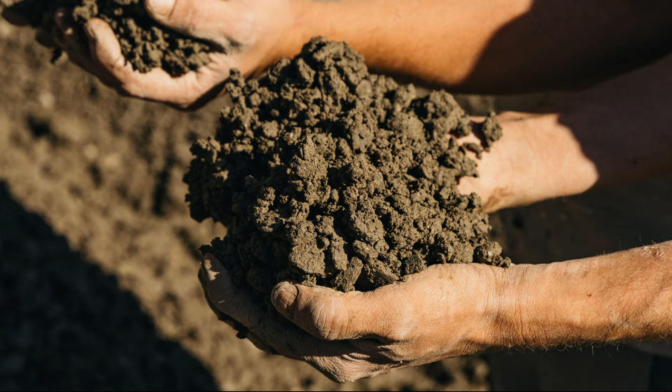But now, where does our building material come from: earth, and also the gravel, the sand, the rocks? It is excavated, it is eroded material from the mountain. And erosion is always still working. We have so much material for earth construction. And this pure earth, it is gravel, sand, and clay, mud, binding material. This is the earth material. We can build with this.

All over the world and in history, people have built with the material on the ground because they did not have so much time and possibility to transport the material. They really used the local material, and if you look around in history, there are really wonderful, simple building examples like the Alhambra, or in Syria, or in Egypt, and the material earth is always used in different techniques.

We have 40 different techniques in the world, and which technique we use depends on the geologic situation, on the climate situation, and we had wonderful building towns and examples, and it is only pure earth. I'm always fascinated when I see this, or when I build with pure earth, it is only earth. It is so simple, and sometimes it is very difficult to find a simple way.

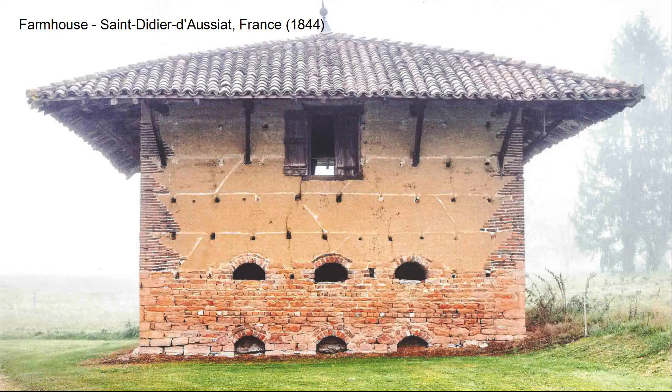In our life, we sometimes think in a very complicated way, and to get back to simple is not an easy way. Sometimes a crisis gives me a better solution. I have to think about how I can change it, because sometimes I have no tool or no experiment, so I have to find a new solution. And it is very important that this new solution is simple.

Also in Europe, earth is a traditional building material. And there is a saying: earth construction needs a good boot and a good hat. And if we look after some details, then it really works. All over the world we find wonderful experience, but the image of these buildings is not so good anymore. But it can show me how we can transform it in the present.

Earth construction in Europe. As a young student, I was wondering why we don't build any more in earth construction in Europe. Because we lost the experience during the industrialization. Because for 200 years we had no real big energy problem. We took out the coal and later the oil, and we forgot to build with earth construction.

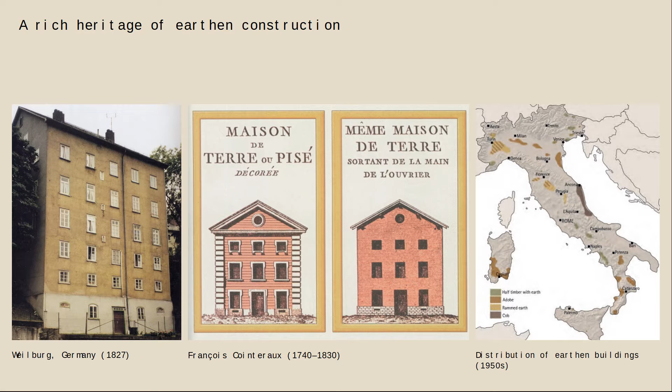You cannot build a structural building like my house or everything what we have done. It is a rule, it is not allowed to build earth construction. This is really a pity, and why, I don't like to explain everything.

It is lobbyism and everything. And this shows in Germany a newly renovated rammed earth house from the 19th century in a wonderful condition. There are hundreds of earth construction houses in this area. I know a 3-story high factory building in rammed earth for 200 years. It is still alive.

It shows a lot what it can be, and all these buildings are built really with the excavation material. And at that time, for 200 years, they built in earth construction because it was cheap, it was good, it was healthy, it was stable, and it was the local material.

And the lifecycle of earth construction is a circle. A circle is like this. You have the excavation. Sorry. Excavation. You have the excavation, or you have the building material, and you make the production process. You build, and it goes back.

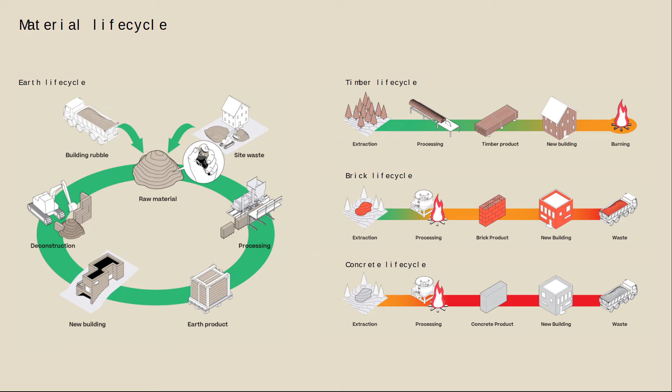Pure earth construction, recycling 100 times, 1,000 times, you don't lose the quality of this material. This is really fantastic in earth construction. Because all other materials, like timber, brick, concrete, are a line. It is no circle. And if it's not a circle, it is not sustainable.

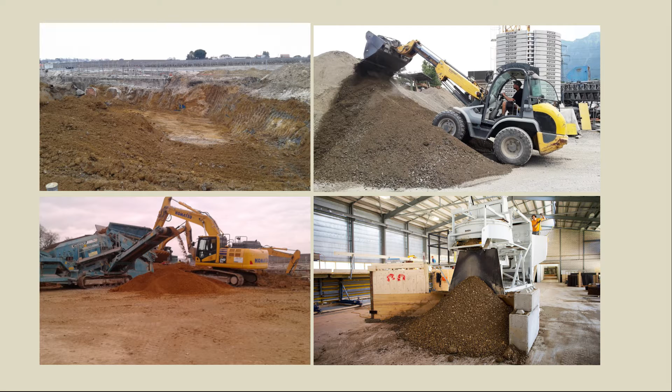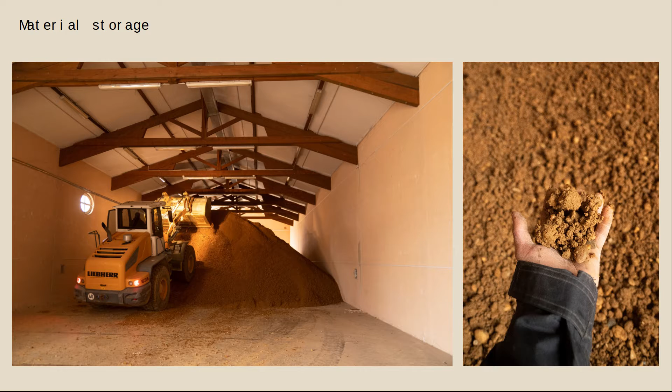We go there, look, make a hole, we take the excavation, make recipes, make tests, then we separate it with normal machinery, and we store it on the side in an old building, and this binding earth gravel is our material. And we make tests, and we look for the best recipe, and we always leave it pure earth.

And now this picture, I want to say, because mostly, if you see on the internet, a lot of rammed earth buildings are not rammed earth buildings, it is rammed concrete. In America, they say dirty rammed concrete. It is earth from the building site, mixed with concrete or with cement or lime or other additives, and then you ram it. You make it stronger, maybe, but the lifecycle doesn't work again.

And for me, it was always very important to develop the machinery, to develop the tools, and not to change the material. Let the material be pure. You excavate it, you look at different excavation material, mix it together so that you have a good quality, and you ram it, and I named this calculated erosion. It is like in nature.

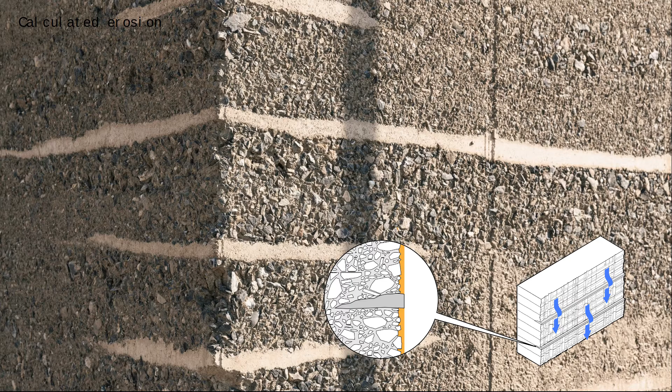In the mountain, the water is running down, and this lime, these are lime plaster layers, rammed in there. It is like a speed breaker for the rain water. And the wall gets more rough. The walls are changing, but they are not destroyed.

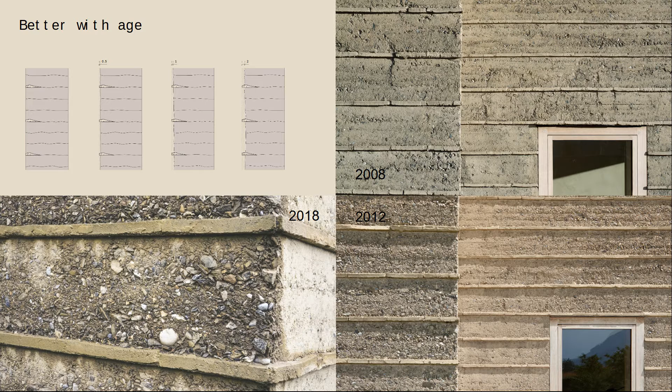And I have several buildings built with very little roof, and there the speed breakers are bricks, or here with lime. And you see, here is the erosion, here is the sedimentation, here is the erosion, sedimentation. It is always a moving process. Mostly, calculated erosion is not a technical problem, it is a psychological problem.

If after 3 hours of rain a lot of earth is lying on the terrace, the client will call me: what's happened? My house will be swept away. But we have to discuss, we have to see this moving, this change of the earth construction, you have to accept. In the same way you accept that wood construction gets gray and changes its coloring like this.

There is enough experience I have made in my workshop here with bricks, but you see also in Yemen and in other countries the same solution. It works a very long time. And this earth construction is all over the world in a different way. You can make climate buildings.

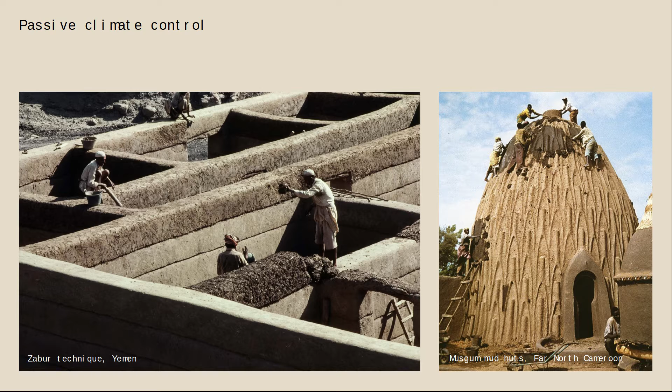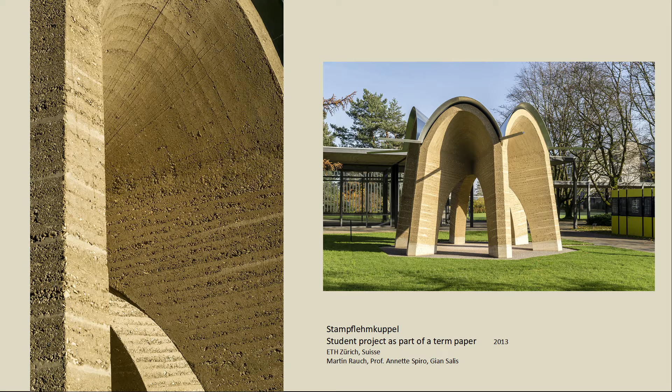You see here the calculated erosion, and the form is from the water developed themselves. So I think it's very interesting, and you can also make some arches. We have made it in ETH with students. Rammed arches. Is it possible for building new structure systems also in rammed earth?

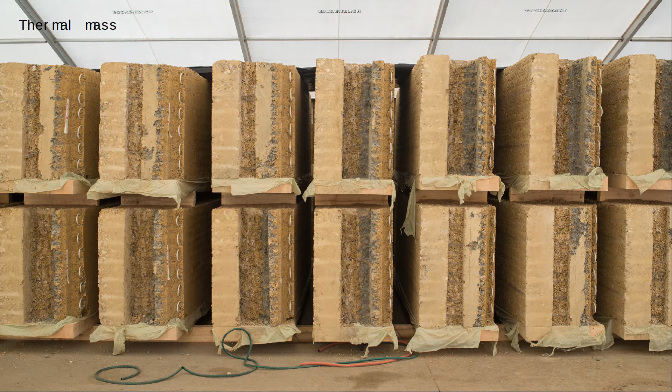It's to develop this, and we have to modernize the earth construction, and it gives a lot of different solutions. We produce earth construction now. If we compare concrete construction 80 years ago and how they developed it, it is a lot of changing.

My own house: after 25 years experience in earth construction, I wanted to build my own house as a self-experiment. As a co-planner, I have planned it together with Roger Boltshauser. As co-planner, as a client, and as contractor, I have to take all the responsibility myself. And this building is for me very important to get the trust to this material and to this technique.

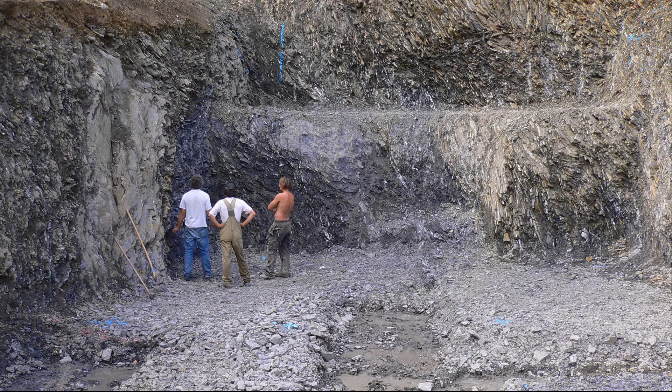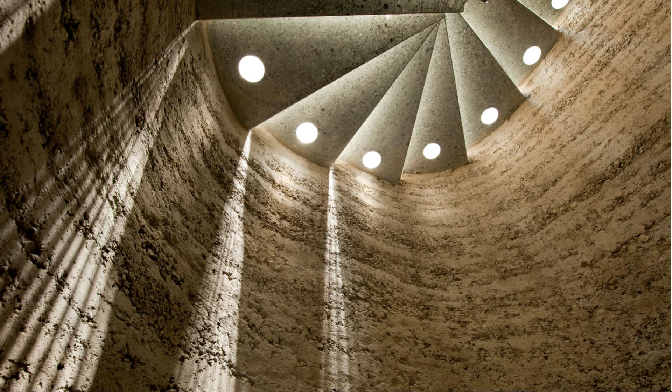Trust is a very important word. Trust to the material, trust to the system. So we had used the excavation. It is Flüschgestein, it is special earth. And we have 100% excavation mixed only with a little bit of water, rammed it, let it dry. It is dry

excavation. It is only rammed excavation connected with special, wonderful tiles, and that is also in a good design mood, and also rammed earth floors, plaster with clay, white clay plaster, and here outside the calculated erosion on the east side. There you have really no erosion until 15 years.

And you see there is a very monolithic work with earth construction, rammed like a rock in the landscape. And the next project, what I have started in 2019, to build my own work hall. It is because I need a better tool to make big experiments, to make big projects.

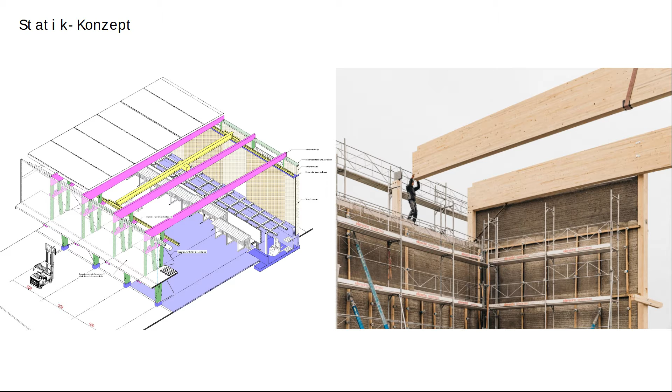We get more trust to this, and that is a very sustainable way to build. And we should not only build our houses and living spaces in a sustainable way. We should also build our industrial buildings in a sustainable way. The office building we are still building now.

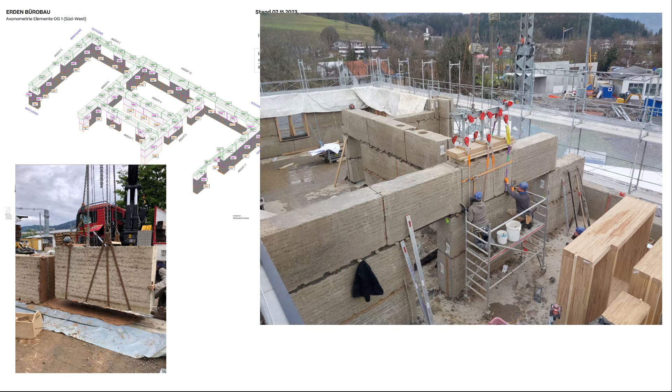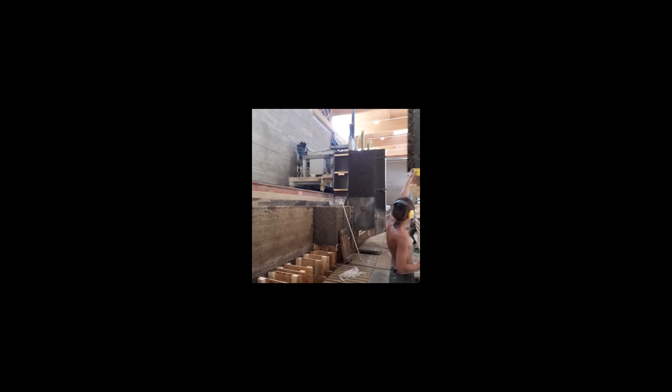We have produced the elements with raw material, only this rammed earth, the rammed excavation. We have cut it in blocks and then set them up, like Lego. You build the house like Lego. And there it is, the production: there is a 50-meter long line.

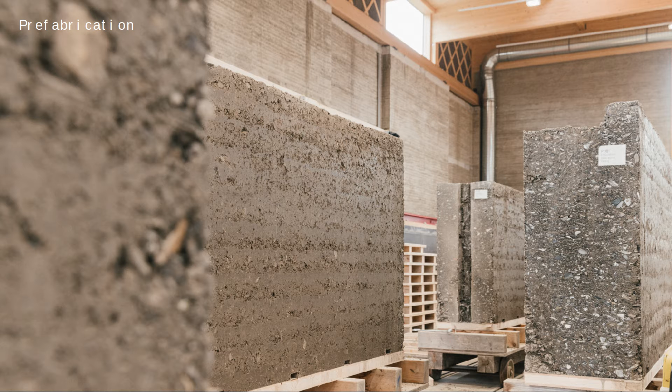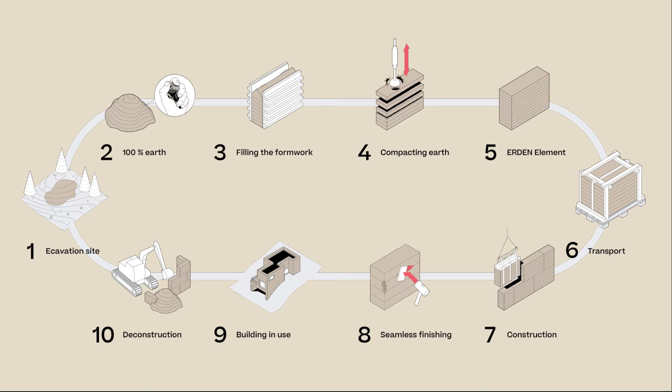You fill this with earth, ram it, then you cut the elements, then you put out the elements, let it dry. Each element gets a number, and then you transport it to the building. And so the circle is closed. Excavation, building, and so the circle is closed.

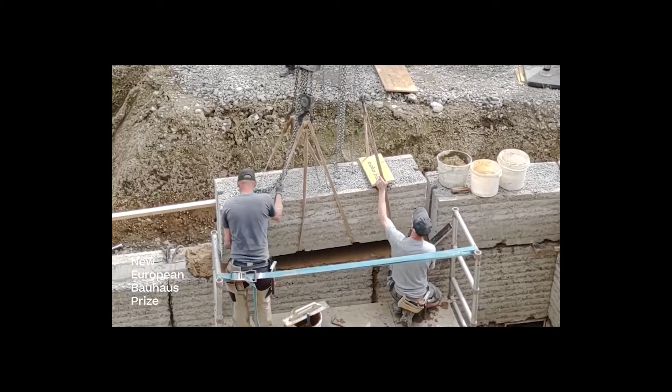And 2012, this was a flagship project with the circular building in Switzerland with Herzog & de Meuron. There was the question to build a factory 110 meters long, 12 meters high and 30 meters wide, a very big work. We needed about 8-9 months of production for this.

And in this very high cost country, Switzerland, I know it is only possible to produce this factory if we use new machinery, new tools to be more economical. So this factory is for herbs, for storage and working with herbs, and there the climate is also very important. And so the walls are 45 centimeters thick, and these walls are also a climate aspect because they can take the humidity and bring it out and back.

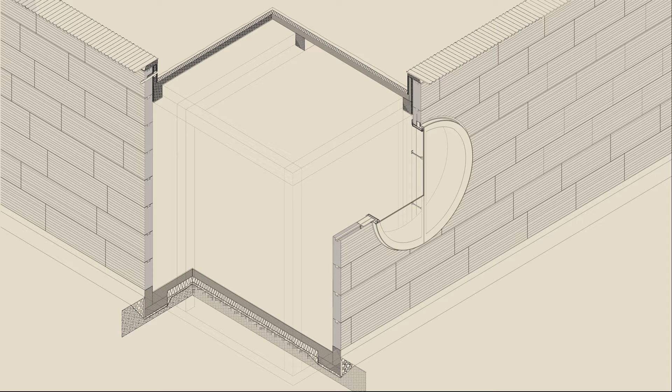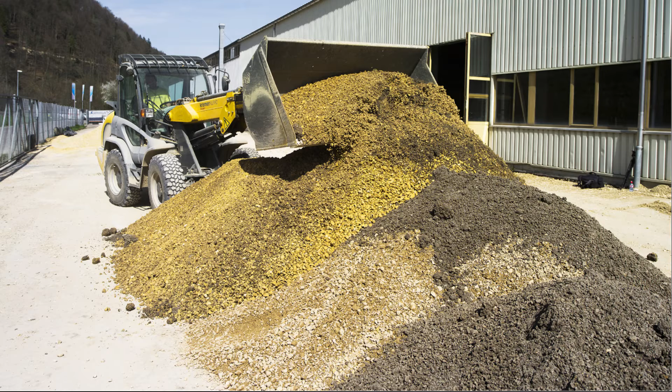Transsolar has simulated it first, and after 5 years, they have seen that the earth construction really works as a climate machine. And this is also a very new aspect. So we mix this together with a little bit of water. It is only 9%, it is very dry. And then you ram it.

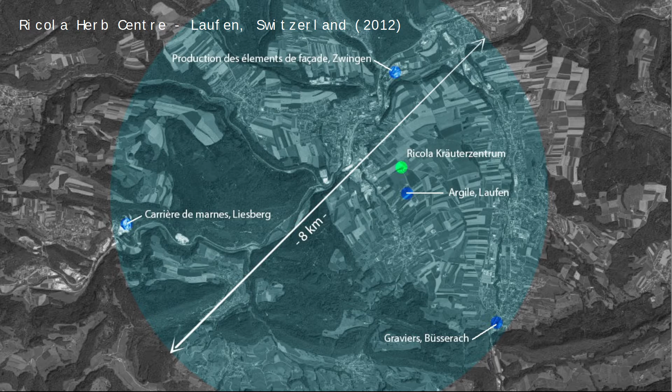The machinery goes there, and all the material we have used we could find within a circle of 8 kilometers: the gravel, the excavation, the argil or the mud, and also the production site. So this material was transported very little. And then the prefabricated elements were dried and set only with clay plaster one to the other.

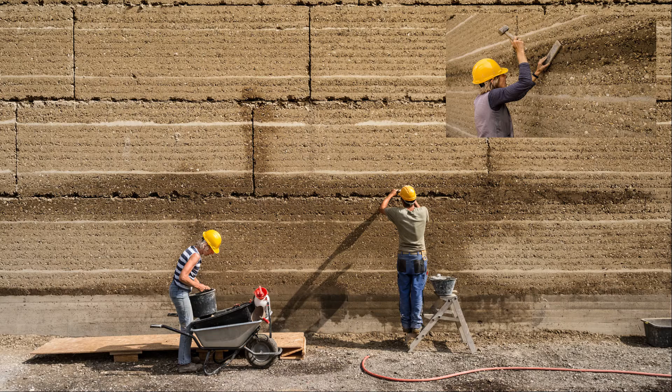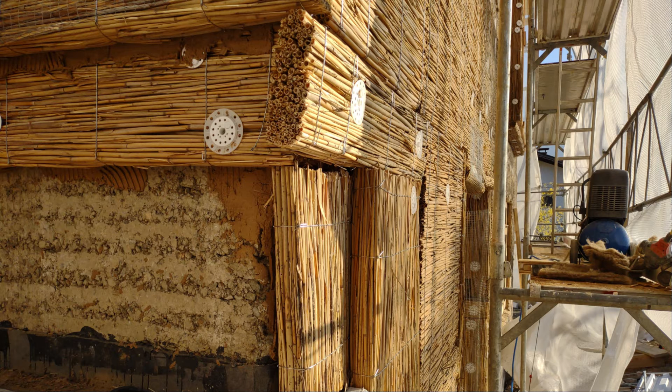And this technique we use very often, also for houses, as a building system. You can produce earth blocks, dried rammed earth blocks with no reinforcement or such, only earth alone, and then you can set them up, and with a crane you put one wall on the other wall, and you can go up, and you can easily build 3-story buildings like this. And then here, this is an example.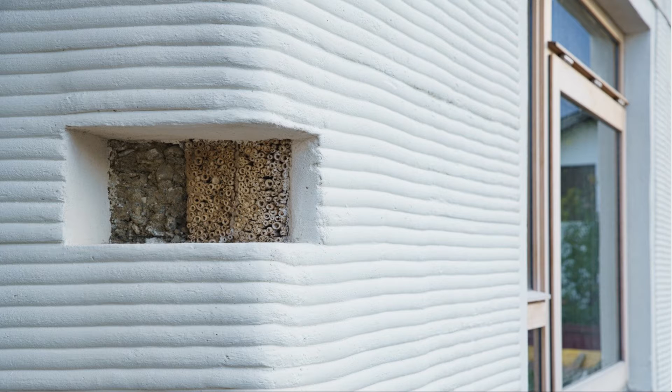We have isolated outside with reed. For me it's also important that the isolation material is sustainable. It is reed, it is straw, maybe fiber or like this, and it is plastered outside with lime to protect the isolation.

So you see here, this is my first work space, a ceramic studio from 35 years ago, and this is the new house of my daughter, and this is a rammed earth house, load-bearing, heated by sun, and inside the earth construction is not plastered; the joints of the elements are restored or retouched, so you don't see them, and so on.

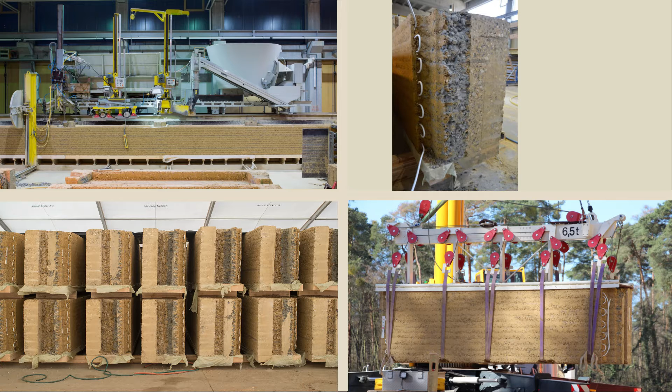Another very important example is Alnatura. It is in Darmstadt, an office building for 350 people, and for that the new solution was to make isolated rammed earth blocks. You see, outside is 38 centimeters of earth, isolation with glass gravel, and inside 14 centimeters of earth construction with pipes for cooling and heating.

And to produce this in an industrial way, we had to produce 370 elements like this. We have developed a new machinery, different tools, and also a lifting system. You always have to find a solution how you can build it, how you can use it, how you can make this in an economical way. And this is also always, I don't know the English word, Herausforderung. It is really always an interesting situation.

So we have 12 blocks, 12 meters high, block for block, and the joints we retouch, and this is only pure earth. It's not stabilized, it is only pure earth with calculated erosion. And this picture shows that it is possible to build towns with earth construction. Why don't we do that? Because it is so sustainable, it is so healthy, and it can be a new solution.

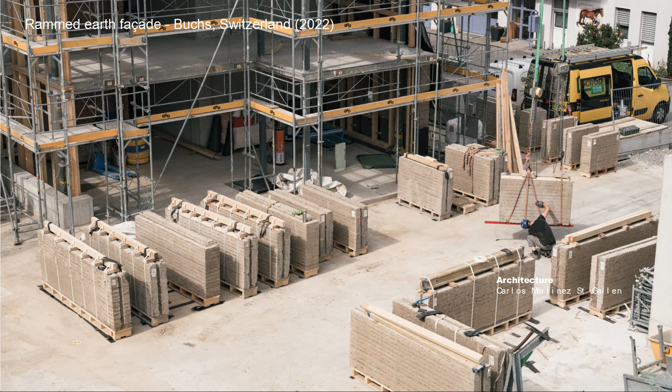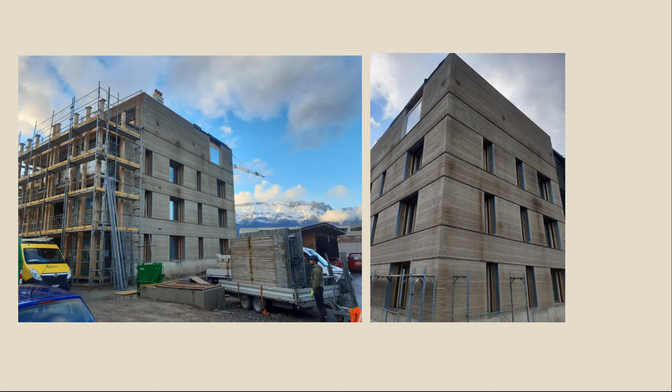We have to find a way how we can change the building system. I think it is very necessary to find a solution, and earth construction is one part of this solution. And so I cannot show a lot of different projects. This is a facade for a 4-story building, a living house. It is earth construction, 35 centimeters outside, inside 7 centimeters, in the middle isolation, and it is a solution showing that we can use earth construction more than we think. And what I want to show now, this is a pilot project.

What we are still working on now is the Hortus project in Basel with Herzog & de Meuron. And it is very interesting because it is a combination of earth and wood. I think earth and wood as building materials for the future really make sense, because earth has what wood doesn't have, and wood has what earth doesn't have. And if you marry these two materials together in a good solution, it is very interesting. And so we were involved in this project.

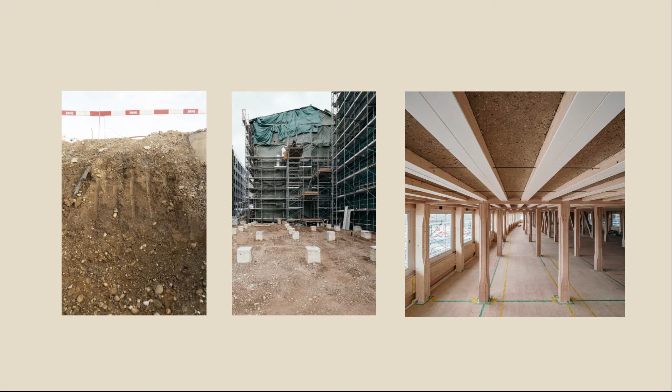In the last 120 days we have produced 15,000 square meters of ceilings, filled with earth construction with the local material. As you see here, the building site, here is the excavation. And the building is a 5-story high wood building. It has no cellar, only columns for the foundation. And this earth, 80 centimeters of this excavation, you have to fill up also in the ceilings.

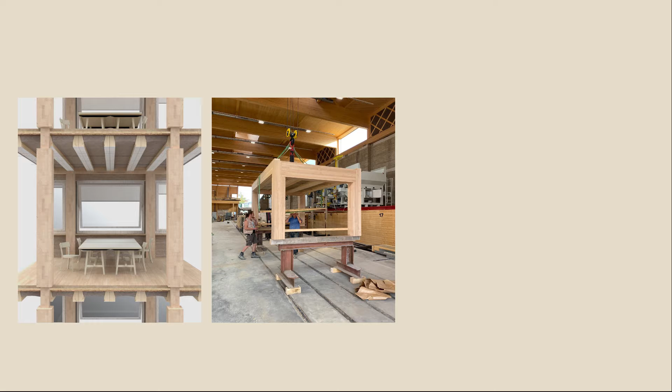And for that, with Herzog & de Meuron and ZPF Ingenieure, we found a solution to develop this ceiling system, and we made mock-ups for fire testing, and that was really a goal because the earth construction protects the wood construction in a fire. The earth doesn't break down, and I can say earth is better than concrete as fire protection.

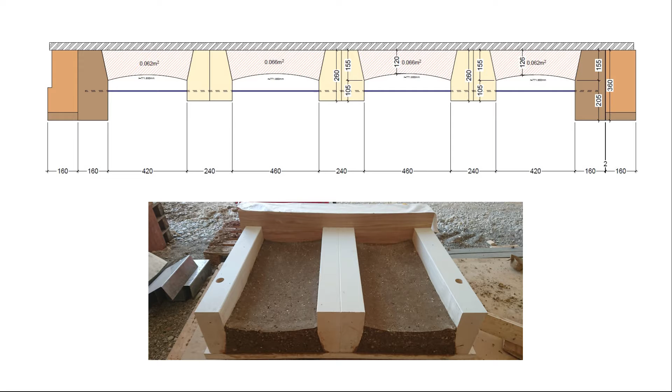And here is the geometry. Also there we have brought in 3,000 tons and 820 elements. And we wanted to make a field factory. Also we made tents. There we have produced a machinery to make this in a very new and efficient, economic way. And here they were filled like this, then we turned them and set them on the building, and the earth dries in the building.

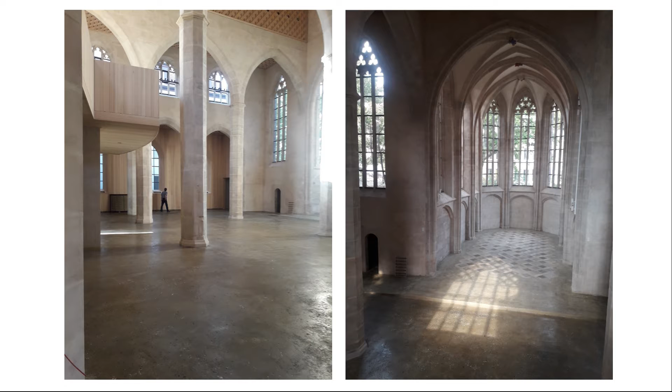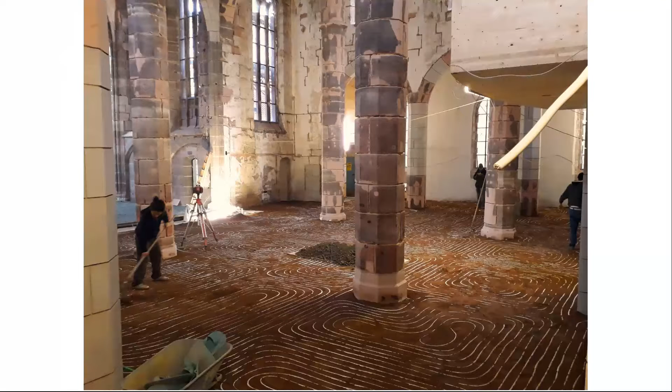So now we have talked about the walls, we have talked about the ceiling, but also the floor is a very important part, and we have made thousands of different rammed earth floors. An earth floor is rammed earth in a different way. You know, also for heating, you put earth and sand and ram this like a garden, like asphalt.

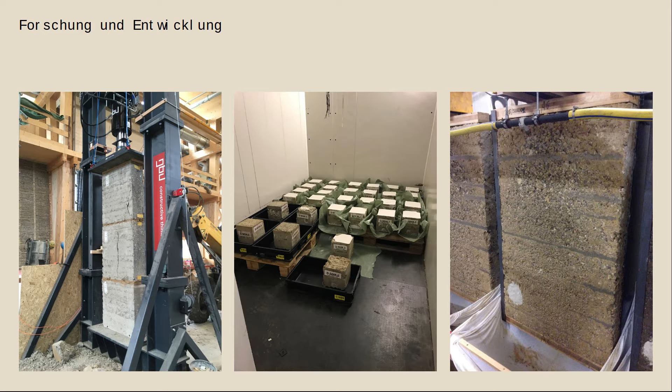At last, what is needed for the future to scale up earth construction? It needs development, it needs also Forschung, Entwicklung, and so it's necessary that we make our own development. In the Werkhalle we have made high pressure machinery to test, to make erosion tests.

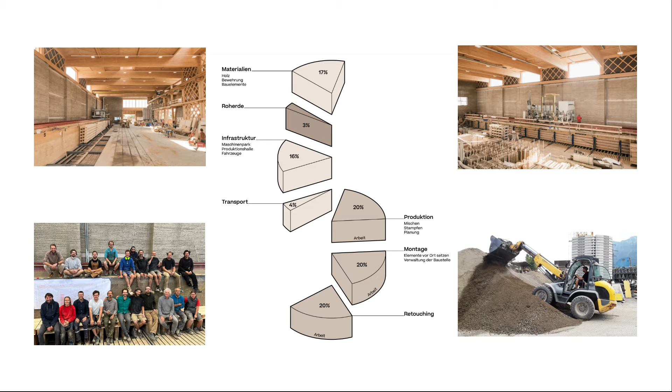And the second part is the human, the worker, and it is education, because to scale up earth construction, it needs educated and skilled workers and people who know how to build with earth, who are fascinated by this material. And in our company, 60% of our volume is personnel cost. It is a very high rate, but it is also good. It's together, but we can discuss it later.

And 20 years ago, a delegation of bank people was coming to Austria, to my site, to check: is a sustainably built house creditworthy? I don't know, it's really changed. But yeah, in Europe earth is relatively expensive, of course the work, but in other countries, earth construction can be a really important solution. Thank you very much.

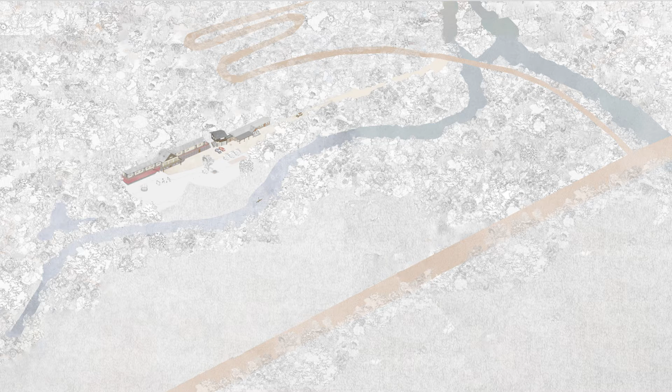It was a very long, very narrow house, 3 meters wide. So not really convenient for a family vacation house. We didn't keep the building also because when there was a huge inundation, and we see it's coming back every year, the house was also inundated. So it was not accessible anymore, because the road leading to the house was also affected.

So we proposed to raise the main floor of the house 2 stories up. And by this, we also made the house accessible from the road behind it. So now it's 2 stories higher than it was before.

You can see here in the axonometry the design of the house. It has the same square meters and the same volume as the house that was built there. And that was also the rule of the permit, that we had to use the same footprint of the house. So we had to build it on the same footprint, and we had to respect the amount of square meters and volume of the existing house.

But by lifting the house 2 stories up, we also freed up the valley. And in this way, we could give the valley back to nature and reconnect with the 2 Natura 2000 zones that are on both edges of the valley.

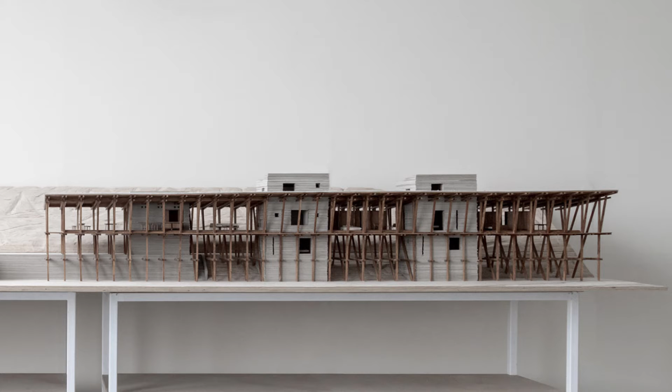So this is a picture from the model that we made in 2019. You see here that the main floor is on the second floor. That's where the vacation house of the family is. And in the towers, we allocated the guest rooms, the bathrooms, the technical rooms, all the wet areas. And the idea is also when the family is there and they don't have other family members or guests that are joining them, they can close the towers and the house doesn't feel so big.

The house has 7 bedrooms, so it's quite a big vacation house. But the idea was also to keep it a warm setting, so that you don't really perceive it as a house with 7 bedrooms. That's why I also want to show you this 2D plan.

That's the main floor. You can see that the access of the house is behind the house that connects to the street. Because of course it's a vacation house for all generations, so it also needs to be accessible for a wheelchair. So we had to find a balance between the new level of the house and the level of the street behind the house.

You can see that when you enter the house, in front of you, you have the 2 bedrooms for the children, with on the left side for you a tower that allocates the bathroom for the children, and more to the east, so for you the right of the screen, an office, the main bedroom, and the main bathroom.

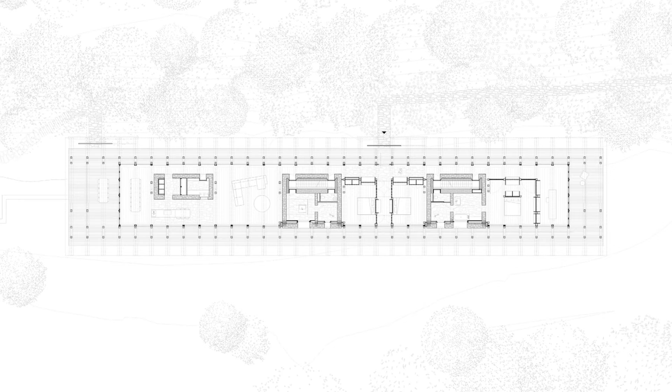But for this presentation, we want to show you how we built up the 2 towers, because that's where we went very far in research of the nature stone of the region. Because for the project, we really wanted to work with as many local materials from the surroundings as possible. So for us, the first quest started to go and search for these local materials. So we did a lot of research in quarries from the region.

We found that there were a lot of them, especially in that region in the south of Belgium. This is a picture, I think, from the quarry of Fresnel. So we really visited a lot of quarries. We found out that some are smaller than others. Sometimes it's only just a family that has a quarry. But we sought a huge volume to build this house, so that was very important for us.

But we are BC, so we even searched a bit further than using nature stone. And the unique moment came when we had a talk with the people from GBA, from the quarry Grès de Bois d'Antine, and especially with Anne Bonson. And she said that we could also use the nature stone from ruins that were built on the quarry itself. This is a picture of the house, so the stone that we could use, and they say that it's the house of the former family that started the quarry of GBA.

And it's funny, but when we started the project, we didn't know how the building would look, and especially not the nature stone towers. And this picture shows that we were very impressed, and that it was the first moment that we imagined how the building would look.

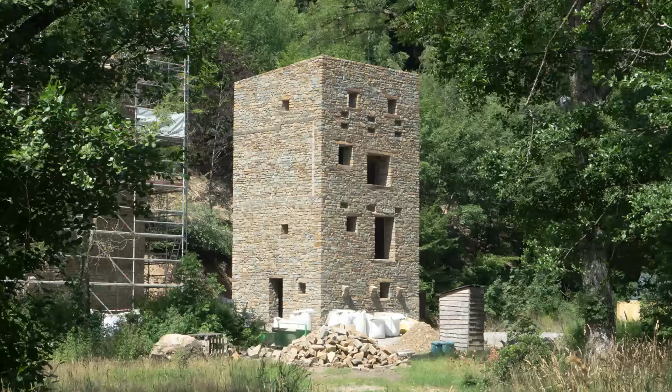This picture was taken, I think, last summer, when the nature stone towers were ready. You can see that they really look alike. We also really liked the way they were built before cement came up. So the old house was built with a lime mortar. So we also built up these towers with lime mortar, with the idea that if, imagine, in 1,000 or 2,000 years they demolish this building, they can also reuse this nature stone.

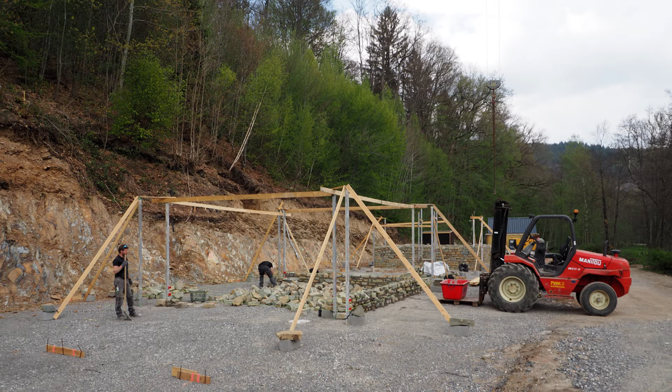This is a picture when we started with the building of the nature stone towers, and you can see that we are starting on a carpet of gravel. You don't see foundations. That's also something that we didn't put here. It was also in the permit. We can't use poured concrete on site because we are in a nature zone, and we had to find a solution.

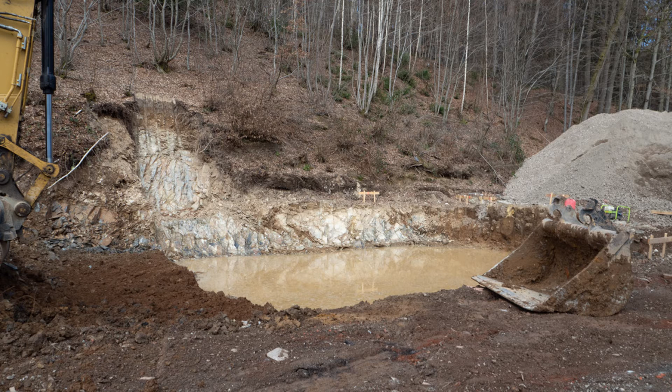But when we were digging on the site, we found out that 60 centimeters deeper or 1 meter deeper, we touched solid ground. It was a huge rock layer under the site. So we had just to dig out all the earth and to replace it by gravel. And we stabilized the gravel with geogrid. So even for the foundations, we just used local materials from around, so gravel from the quarries and not concrete. So we founded these towers just on nature stone. So from the earth until even the roof, it's only built with nature stone.

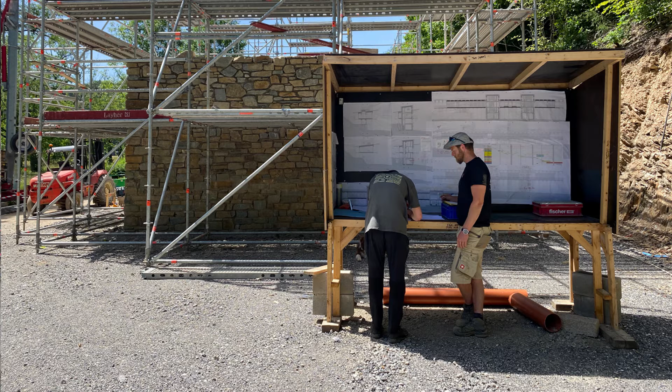And of course, we can't do this alone. We also always seek for good craftsmen that can work with this nature stone. Here a picture of Nicolas from Advitampier, the one that also teaches us how to build with nature stone, because we are architects, we don't really know how to work with these local materials, so we always need good craftsmen that teach also us how to build with these stones.

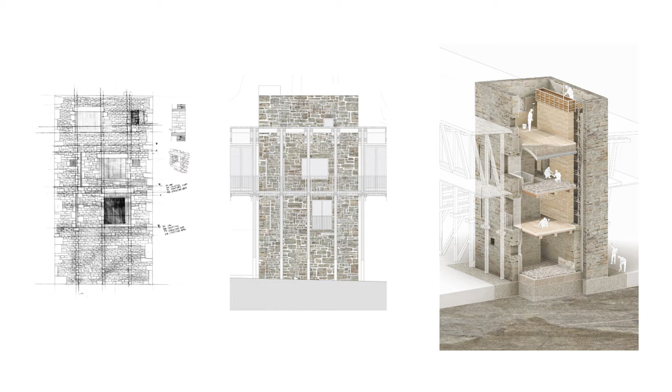When we started drawing together with them, we start, of course, with a 2D drawing drawn on site. Then we go back to the office, we draw 2D plans, and from there we also draw 3Ds just to understand ourselves how to deal with details, with insulation, with a regulation about PEB, just also to understand how the building can look like and how we can solve things that we have never learned before. Because working with local materials and new solutions, we also have to learn. We can't find all the solutions in books, and we definitely didn't learn it at school.

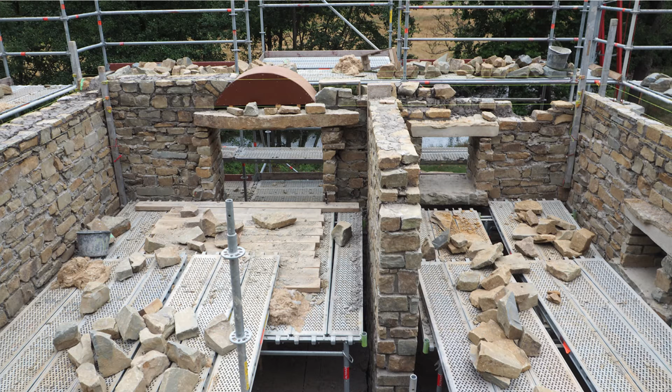This is a picture from the construction site. I think we were at level 2. And here we found out that also the nature stone has its limits. We defined on a plan the size of the windows, but here you can see on the picture that when a window is smaller than 1 meter, you can just continue with the nature stone wall. But when you exceed the 1 meter width of the window, then you need to bring in arches. Here you can see that we had to build an arch above the nature stone lintel to bring the forces to the wall, so that the weight of the nature stone wall is not leaning on the lintel itself.

But when we talk about vaults, another thing that was very impressive when we checked the quarry of GBA and when they were showing us what kind of structures that we could reuse, we also saw some vaults. And these vaults also inspired us, these structures. And we thought, why not also bringing in vaults for the structure itself?

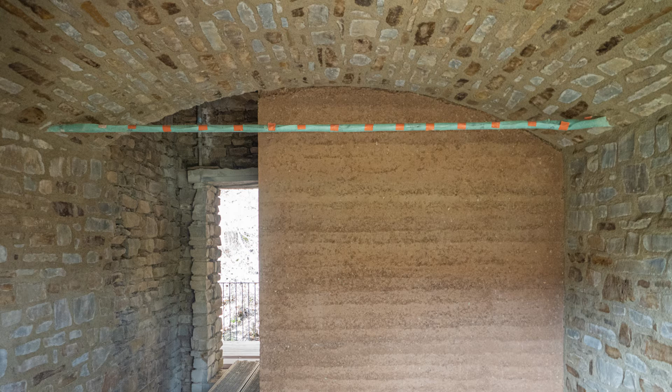Structurally, we also had to check with the engineer how it is possible to use these vaults. And because the vault is quite low, we had to bring in tension cables. Here you see the tension cable, and it's to dispatch again the forces that are coming from the vault on the walls. These are also things and elements that we had to bring in afterwards.

These are things that we didn't design in the beginning, but working with these local materials, it's always like finding solutions in the moment itself, and trying to tie everything together and to bring all design ideas, concepts and materials together. You can also see in this image at the back that we also use some rammed earth, but Ken will explain later how earth from the quarries is also conceived as a part of the design of this project.

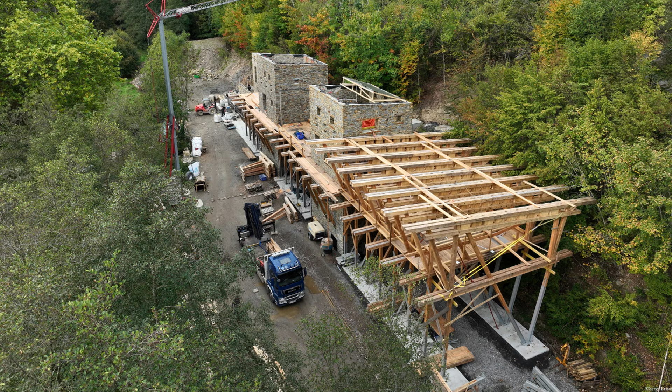Now to explain to you that the nature stone is not only used for the towers itself, I want to show you also this picture from Serge Brisson, because here you see that the wooden structure is leaning on concrete prefab elements that are just leaning on the gravel carpet. And the engineer was not afraid that the building was too heavy, but he was afraid that the building was too light. So with a huge storm, there was a possibility that the building would be lifted up.

So we had to put a lot of weight on the roof because the foundation is not tied, it's not anchored in the ground. So because we have to put a lot of weight on the roof, we as the architects really like it, because we can make a roof not only with tiles, but we can also put nature stone on the roof.

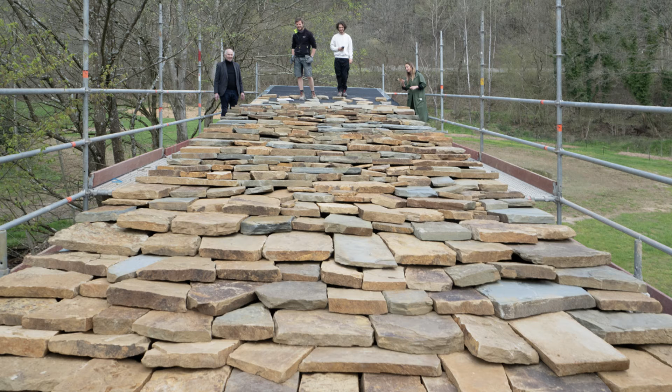So we checked together with Advitam to make some prototypes, first small prototypes, but we had also a bigger prototype of scale 1:1 on the construction site. That is now a cabin, and that gave us the opportunity also to check the roof really on scale 1:1. And we saw that when we stack nature stone as tiles, it was inclined in the wrong way. Go back here, you can see that if you start with one rock and you stack it like tiles, then the last one is really in the complete opposite direction.

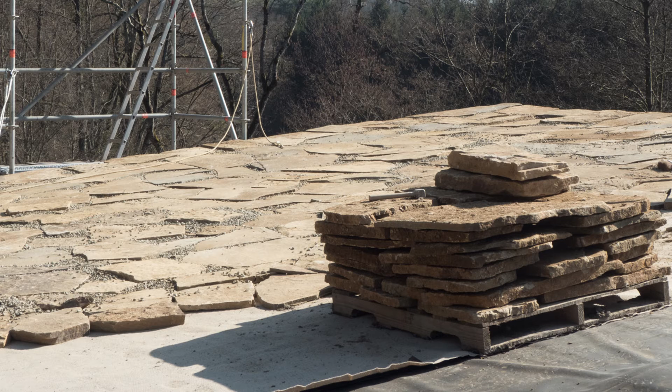And also, the engineer said that we could just use 4 to 6 centimeters of nature stone. So here the roof became too heavy. So that's why we chose to go for opus incertum. It's a way to lay these nature stones, and the joints were filled with gravel from the quarry. So in this way, we can also give place to nature to inhabit this building. So after a while, probably in a couple of years, the building will become completely green, and on the roof, you will also see that plants start to grow.

This is an image when you're standing on the street behind the house that is going up. So from a certain moment you can overlook the house, and I think it will be a very beautiful image when the roof is done, and in a couple of years when it's green, it will really become a part of the landscape and of the nature in a quite artificial way. But I think it will become something very beautiful, and that the nature stone and the surrounding landscape will completely blend in.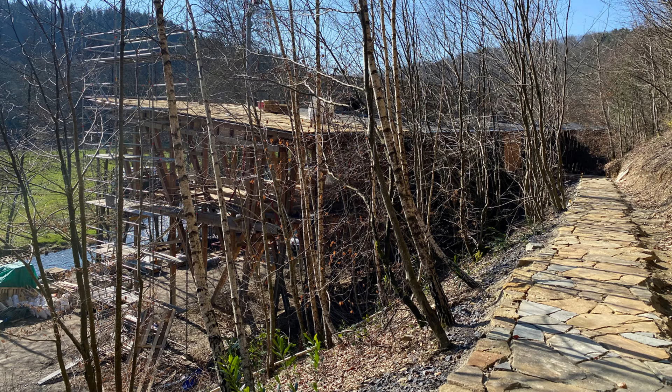Also, the entrance path towards the house is made with the same nature stone, also the opus incertum. So when you walk towards the house, you can also see above the roof. So in a way, it brings together the entrance path and the roof, and you don't even perceive where you're heading to. And that's something that we found out later, but it's something very beautiful.

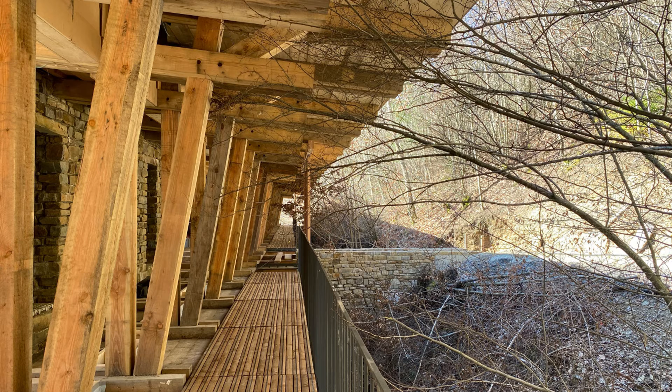This is when you arrive at the entrance of the house. This picture was taken, I think, a month ago. So the complete wooden structure is built. You can see that to enter the house you have to cross a nature stone bridge. So we also had to build the entrance tower. And it's like you cross a bridge to enter or to step on a boat. So that's why we also call the wooden structure the boat, because it's really floating above the valley.

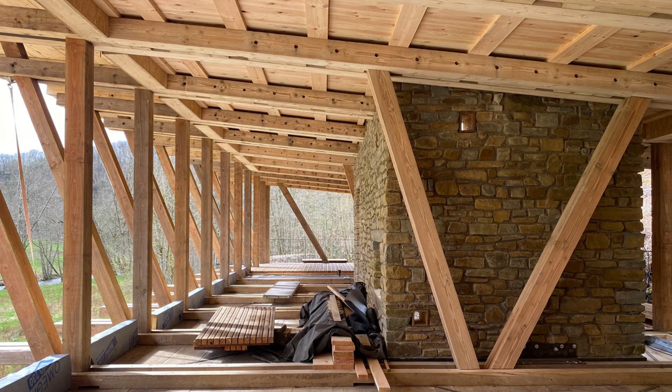And this is a picture from the living room looking towards the kitchen and the dining room. And now that the wooden structure is built and the roof is on the house itself, it's a moment to also design the interiors. So again, a new search and a new quest to find materials for the interiors. So we want to go super far. Of course, we choose again for nature stone.

And also here, we have to find solutions for floorings. We also try to make the countertop of the kitchen out of nature stone. Then the quest is like, what kind of nature stone from Belgium can we use for the countertop? And what kind of solution can we find to make these floorings? Because of course we can't do it in the same way as the entrance path and the roof, because that would be very difficult to clean.

So here, the new quests, this is a picture from 2 weeks ago, I think. We are checking for terrazzos also, in a sense that you can link it with the opus incertum entrance path. But here again, we are searching for colors. For us, this doesn't match really well. The floor would be too blue according to the colors of the wall itself.

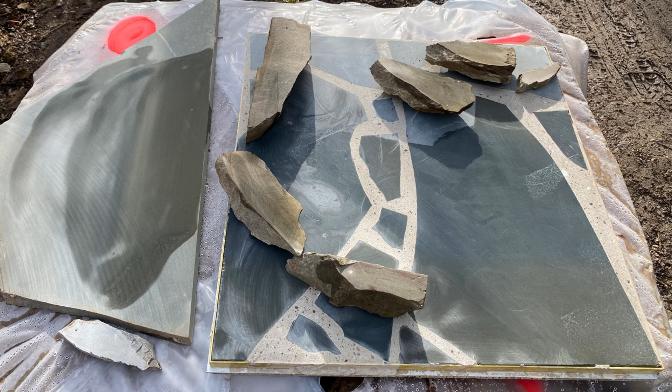So we are searching together with the people from the quarry, from GBA, to find the stone in the quarry itself that has more brown tones to bring it closer to the colors of the wall. And it's because we work with local materials and materials that we excavate out of a quarry, it's always searching for colors. And I think Ken can also explain a bit more how we can find colors for the earth materials, and that are also colors that join the colors of the nature stone that we used.

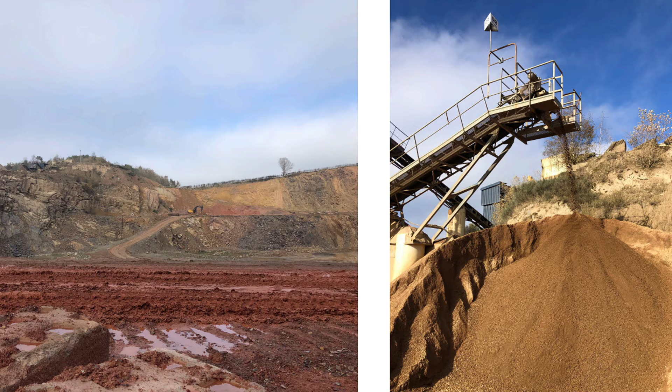Yes, hello. So I will talk a little bit more in detail about what we specifically did with earth construction in this project. And so it also shows a bit, that's why we're also here with two. We're with a much bigger team, and we do a whole range of activities, let's say. So it's design, architecture, but also education, material production, execution, sometimes a bit of lobbying and activism. And so I think when we dive a little bit deeper into this material, it will start to become clear the width of activities that we undertake in BC.

So this is a quarry from near the site. And so this was our starting point also, not only for the nature stone, but also for the rammed earth that was made in this project that we used for the wall and for the floor. And it also was an inspiration for plaster development, so the wall finishing. Different colors in the quarry as we see here, yellow, red, gray, and so on. And so it's always a challenge working with local materials to keep your colors constant.

So when you research and when you execute, in those 1 or 2 years in between, things might have changed in the quarries. So here we did use the gravels and the washed silts and clays from the quarry into different mixtures. That's a process that we also saw in the first lecture from Martin Rauch, that we also do all the range of testing on in the laboratories to be sure that the material is up to its function, that its application can be done with the resources chosen. And also a work on aesthetics.

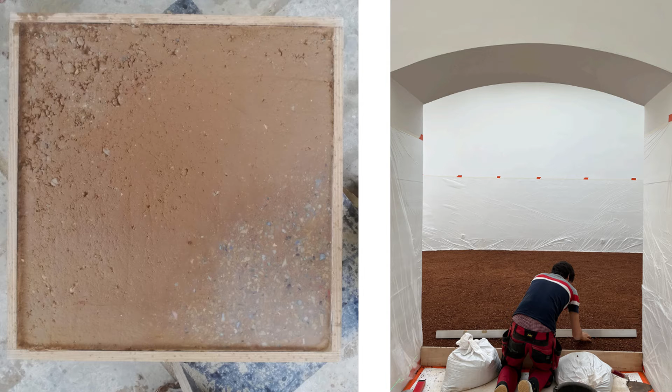So it's multiple materials in a project, so we need to get the materials kind of synced with each other. So it's about, for example, here the rammed earth floor that was made from these local geomaterials. Do we make it into a terrazzo also? Do we leave it as an earth floor? Do we go for a rougher floor finishing? This is all to be tried on samples, and then we go to a bigger scale, prototyping.

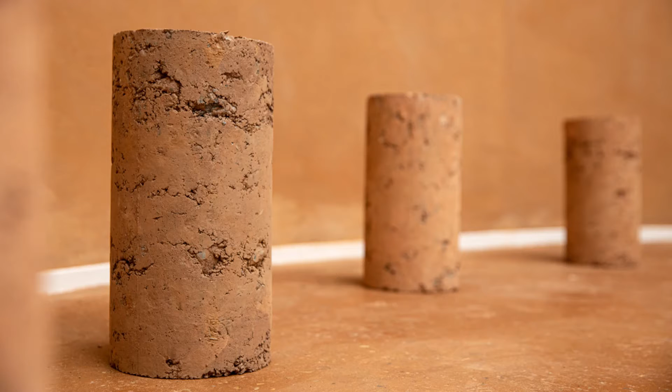And so here we see the wonderful Brecht, one of our experts in rammed earth at BC, here putting the floor in the art center of Hasselt. It's Z33. And so we use this kind of exhibition of the art center where we could show our work. We use this not only as a moment of scenography, but also as a research where we can try our developed materials in a bigger scale. So here we see, again, the cylinders that were chosen, together with the floor and the plasters in an arts center setup, which is actually also a prototyping space for us.

So like this, we always try to weave storylines together, opportunities together to make this happen, because it's not obvious to make this happen, making these materials from local materials, getting everybody on board and assuring everybody that this can be done. It needs lots of time, lots of budget, and lots of convincing, lots of, let's say, human interactions also.

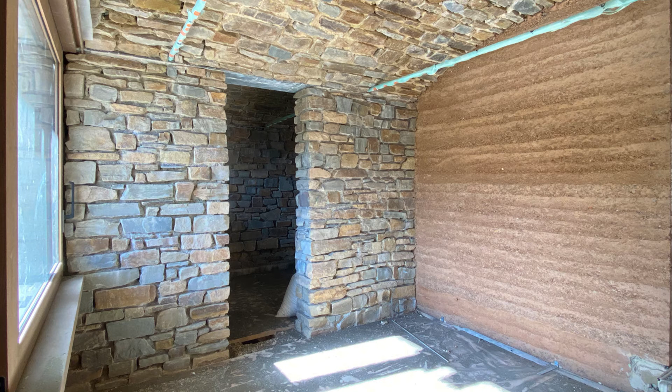And so we try to weave these stories to give them more power, to do also prototyping and to evaluate technically how it goes, so that we can really implement these materials into the construction site. And so in the end, it's Matthias and his team from Lemniscaat, who's also here present today, that did the rammed earth works in Tarnion.

So this is a bespoke project where we develop based from the materials on site into a project. Now, with BC Materials specifically, we have been thinking, if we do this every time from the specific construction site into a specific project, it's really a lot of research that every time has to be done anew. So can't we find a system, a way to do this in a low-threshold way for other people to just implement these materials in their projects without all the extra research to be done and so on.

So that's the idea of Leem, a product range that is started up by BC Materials. This product range consists of different types of building materials that we produce in Brussels and at different partners in Flanders and Brussels, where we have plasters for wall finishing, paints, compressed earth blocks, molded earth blocks for masonry, rammed earth mixes for rammed earth walls and rammed earth floors, and a lot of accessories around it.

So this product range is made, just like these bespoke projects that we saw today, from excavation sites in Brussels and Flanders at the moment, and we're looking to Wallonie in the future, where we in fact use the excavated earths from big urban construction sites to make building materials.

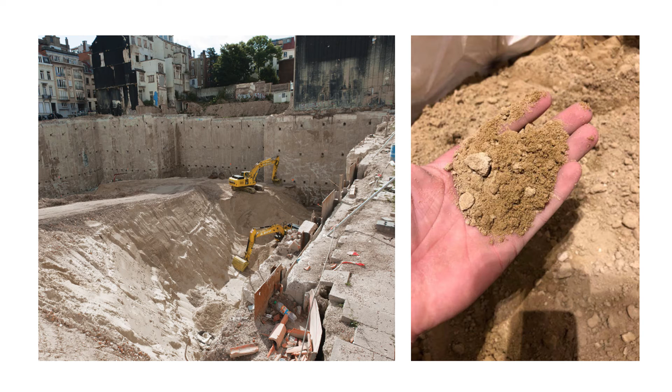So this is our resources. This is the Brussels sand from High Brussels, excavation of an underground parking here. And we tap into these huge excavation streams that are being done in Brussels and in Belgium every day. On a different site in Brussels, we find the Ypresian clay layer, a very high quality clay, which in Flanders is also used to make baked bricks. But here we use it unbaked, of course, in our materials.

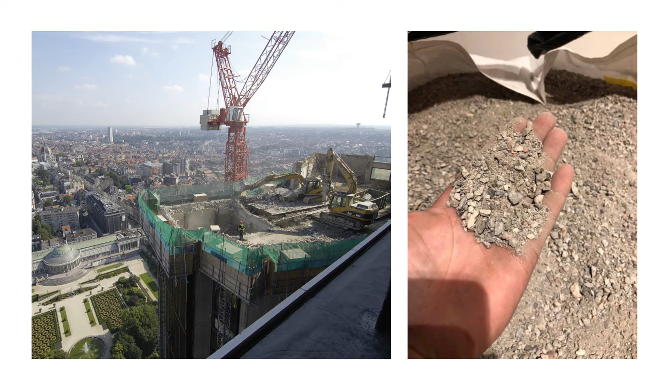Coarse material, we don't have so much geologically in Brussels and Flanders. So for coarse material, we use the demolition of buildings in different kinds of materials, and then we mix it together into our different products. As an example here, we see compressed earth production.

So it's also important for us to use the knowledge which is out there and the machinery that we have in Belgium, which is not used at 100% of its capacity, but which can very much make high quality earth building materials. In this case, a concrete block production facility in Lummen, near Hasselt, where we insert earth to make compressed earth blocks at a scale that renders these products very democratic. And so the idea is to make these building materials available for all kinds of projects, ready to replace fossil fuel intensive materials.

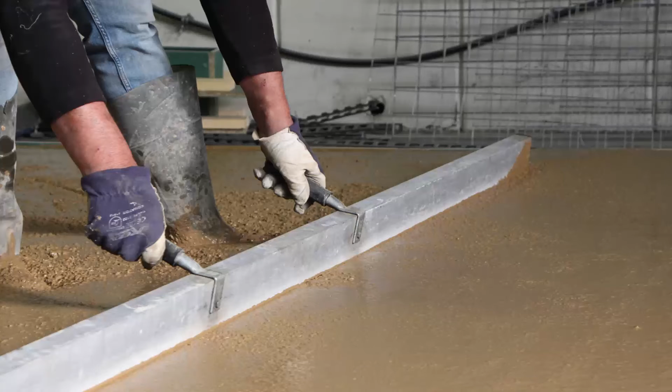But it doesn't stop there. BC Materials, next to its bespoke projects, gets a lot of information and knowledge by doing our own architectural projects with BC Architects, but also the bespoke projects that we do with other teams. And so this knowledge we keep constantly feeding ourselves. It's like a feedback loop between the bespoke things that we do and the material range that we set up.

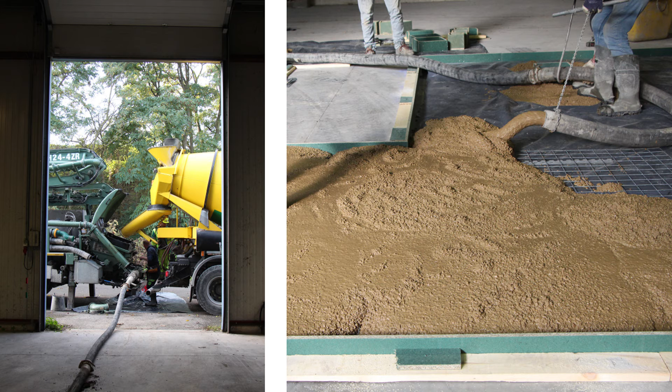For example, something that we're going to launch as a stock product, part of our product range this year, is an earth screed. It's poured. And again, it shows that using machinery that everybody knows in our construction culture, but inserting earth, can lower the costs, lower the thresholds to use these materials, and insert earth again in our knowledge.

A small anecdote from the workshop in Rabat that we were doing a few weeks ago, with Emmanuel, who was here also. We were talking about traditional materials in Morocco, earth and fibers and so on, that are considered by the society as traditional materials. And then the Belgian delegation was saying, that's weird, because when we talk about traditional materials in Belgium, they mean the concrete block, the baked brick, and so on.

And so it really shows that there's a lot of knowledge of how to do things that we can use. The traditional knowledge in Belgium is also a kind of craftsmanship, knowing how to work with this machinery, how to get good products out of it. So there is knowledge available.

It's just that with little tweaks, we can insert something totally else into this machinery and create really high quality products that everybody can use today and that can replace the fossil fuel and intensive materials today. I think that's a bit the message that we want to attach to the bespoke projects. In fact, we need to learn from these innovative, small, one-off projects, let's say, and really get the knowledge out there and work towards changing our building culture, let's say.